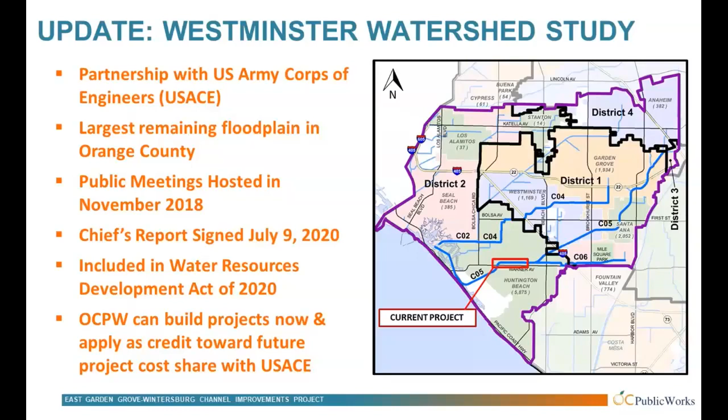Moving into the goal of the Orange County Flood Control District and Orange County Public Works on behalf of the Flood Control District, our goal is to remove people from the floodplain. We want to provide flood protection, and that's our goal throughout the county.

In this particular area, there are 4 major projects we need to complete in addition to the one we're describing tonight. I know when we get to the question and answer period, probably the first question would be: I live in this area, right next to the channel, and I'm currently paying flood insurance. When am I going to be able to stop paying flood insurance? To get to the bottom line up front, I wanted to address that with this slide.

So there are 4 projects in addition to the one we're describing. We're here to talk about the project in the red box, but there are 4 other elements we need to do. One is Warner Bridge at Huntington Harbor. It's a hydraulic constriction that's causing us problems from a flood protection standpoint, so that project we're going to be looking into.

Some of you may remember we completed a project on this channel back in 2015, and we need to come back and complete this element from the tide gates to what would be the extension of Bates Circle. That's shown as number 2 there.

The third element is that after we complete the channel improvements from Warner, there are 3 bridges - Warner, Springdale, and Edwards - and we're looking at the necessary improvements those bridges will need to accommodate the flood protection needs in the area.

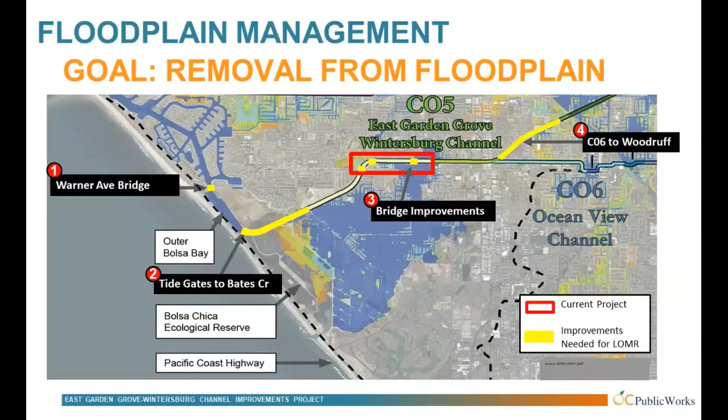So moving on to the specific project, we'll get a little more detail now, honing in. The project location starts at the upstream side of Warner, right where we left off on the previous project, and it extends to about 1,200 feet downstream of Goldenwest. That's right near Diane Lane - if Diane Lane extended across the channel, that's the upstream limit.

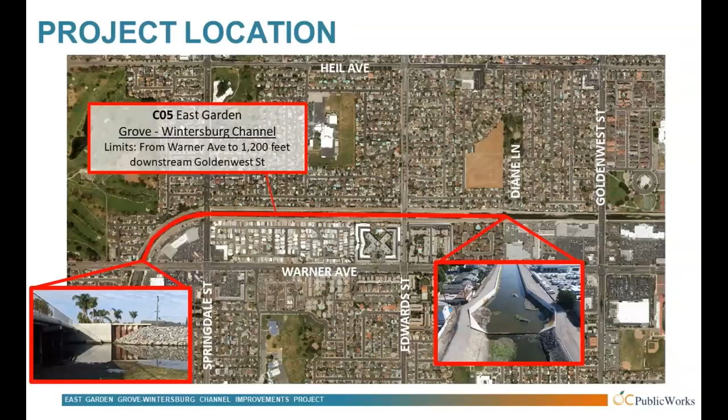Right now there's an existing transition structure where the channel transitions from a concrete channel to the earthen channel, and that's our upstream limit. You can see that in the inset on the right. So the project purpose is flood protection and seismic resiliency. This project lies near the Newport-Inglewood Fault.

You can see on this map roughly where the faults are indicated. That green dashed line crossing the channel not far downstream from our project is the one we're primarily concerned with for the seismic design of the project.

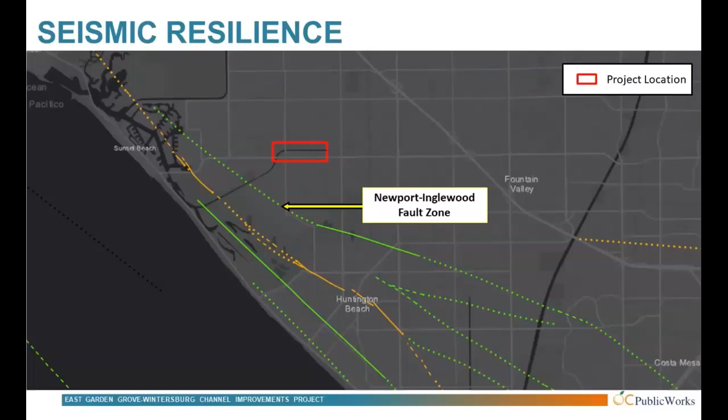So this is a levee. Levees hold storm waters within the channel, and they also hold tidal waters within the channel. Seismic resilience is a big deal when it comes to levee protection, and that's why it's an element of the project. The other major element, obviously, is flood protection.

Everybody on the line is probably either a resident close to the channel or has seen the storm events that produce conditions like in these photos. The channel carries a lot of water and it can get really high. This photo from 2017 illustrates that well. We often get phone calls from the public regarding flood protection here, and this photo pretty much demonstrates the need for the project.

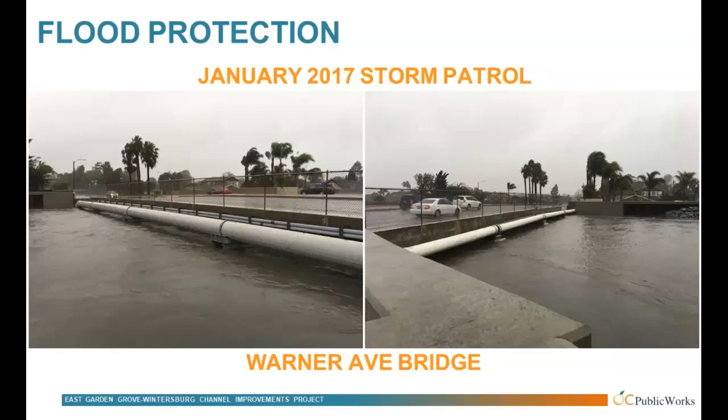Aside from the capacity issues within the channel that we're addressing, there's also what we call local drainage problems. These are on the backside of the levee—we get ponding that occurs, and that's a problem we're looking to address within the project as well.

Moving on to flooding, this is a map straight from the Army Corps' study. Through their hydraulic modeling, they completed two-dimensional hydraulic modeling that predicts where they anticipate flooding would occur. There's a legend there—we're talking about a 25-year event all the way up to a 500-year event that was analyzed. That's what the different colors represent in the floodplain.

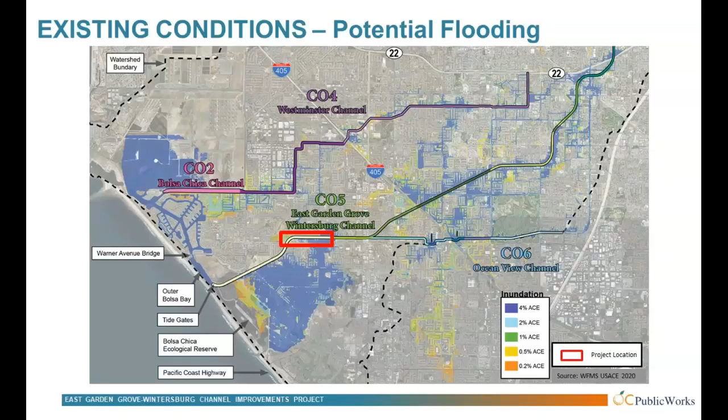The goal of the study and of this project is to make all these blue, orange, and yellow floodplains that are indicated go away. I just wanted to show on a larger scale how big a flood risk this channel is. The project consists of five major elements, and over the next slides we'll go through each of those elements.

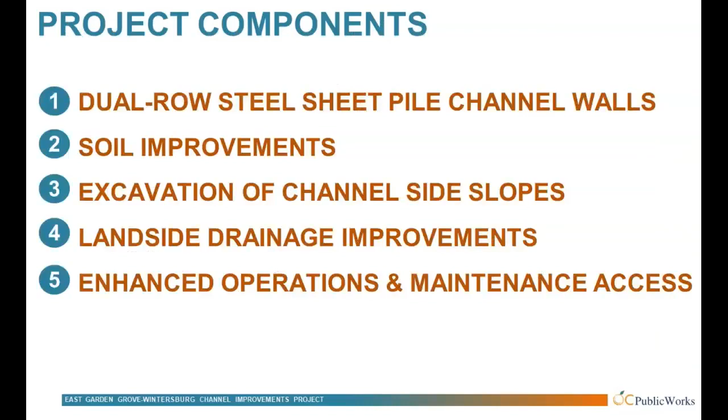The first element is installing a dual row of steel sheet piles. This is very similar to what was installed downstream of Warner. If you live in the area, lots of people actually use the channel to walk out to the Bolsa Chica wetlands area. This project will be very similar to what was installed downstream.

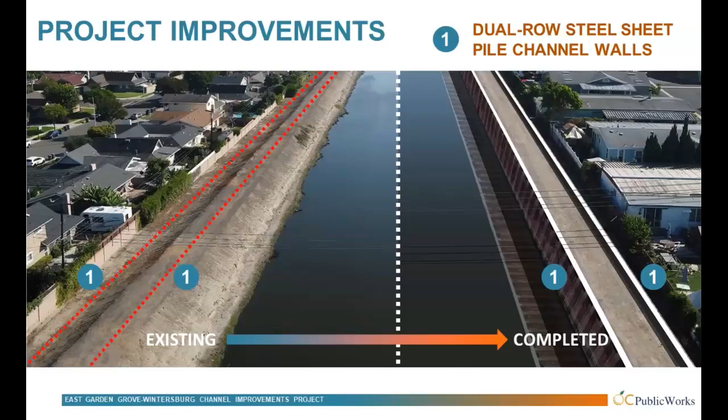As we're mixing that soil, we also inject cement, which strengthens the soil. Through that strengthening and mixing, you produce a really strong soil—it effectively becomes a strong soil wall. Then we have sheet piles on either side of it that are non-erodible faces. The combination of all these things together is how we get our seismic resiliency.

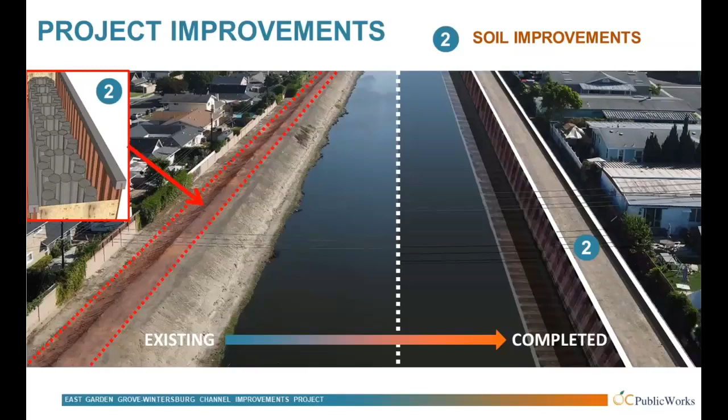After those two elements are done, we look to increase the channel capacity, or the amount of water that can travel down the channel and out into the ocean. So we install the sheet piles, do the soil mixing, and once those improvements are complete, we come back and remove the channel sides, or what we call the soil wedge. On the left side you see the existing levee, and on the right side we excavate out about half of it because the channel gets widened.

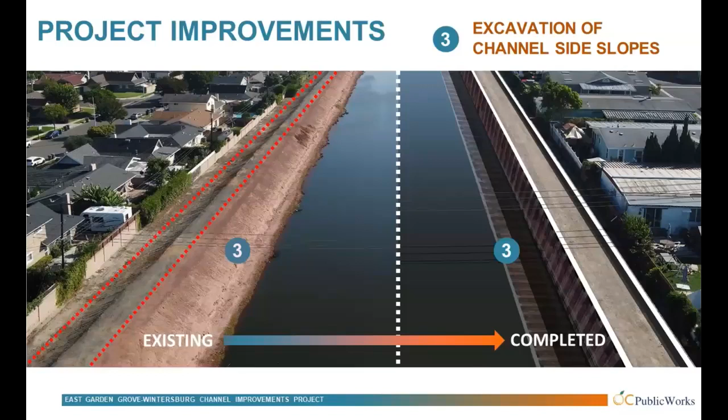So landside drainage improvements can't really be seen all that well in this photograph, but in the field, you're not really going to be able to see it either because it's mostly going to be below ground. What happens is there's the existing soil, there's some level of infiltration that can take place with it, but it's overwhelmed reasonably easily.

What we do with this landside drainage improvements is we're going to be installing underground storage chambers. We're going to be installing pervious material, and that's going to provide capacity to store stormwater below grade. We're also going to be installing some concrete curb, basically at the property line. Through the combination of the storage and the curb, that's going to contain a typical storm within the channel right of way.

If the water starts getting to be too much, then there'll be overflows that direct it into the channel. That should alleviate the problems that we showed earlier, where we're not going to have that ponding that's overflowing into the adjacent property nearly as much.

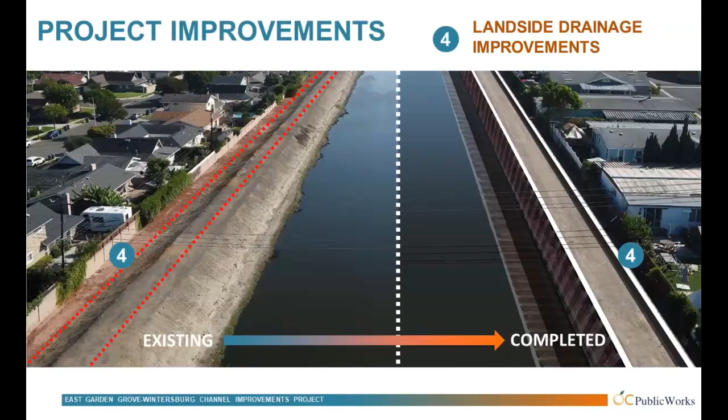Then the final element is operations and maintenance. It doesn't really do us a lot of good if we build this big, beautiful flood control feature and then we can't properly maintain it.

Again, this is a bit of a nuance, but effectively what happens is we're installing our maintenance roads at the correct width. We're ensuring that we have the adequate horizontal distances so that we can get out there with our heavy equipment, and our operations and maintenance service area can maintain and inspect the channels properly.

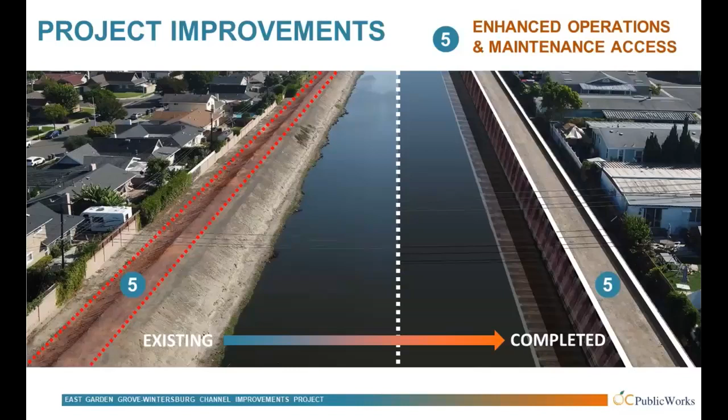So this is a rendering that was provided by the project team. The left side is what we have today—it should look pretty familiar. The right side is hopefully what it looks like at the end of the day. It should look pretty close to that.

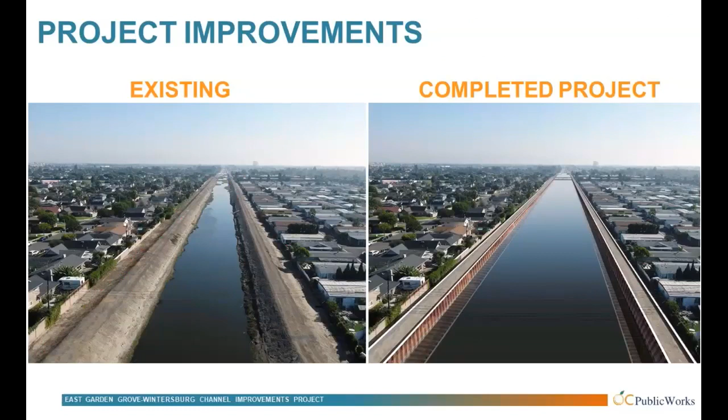This is another rendering, this one of Edwards Street. Again, the left side is existing, and the right side is what it'll look like post-construction.

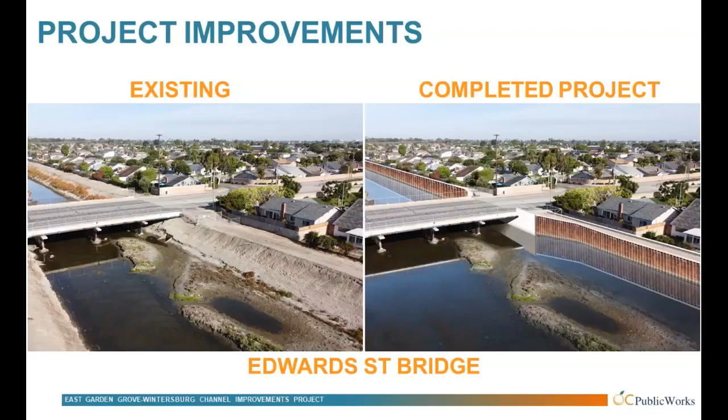So diving into project schedule, how long it's going to take, to let you guys know what to expect. We awarded this as a design build contract—actually our first design build contract on the horizontal side that Public Works has done, which is pretty exciting for us. We did that back in November, and now we're here before you today for our pre-construction community meeting. We're going to be kicking off our first phase of construction in August.

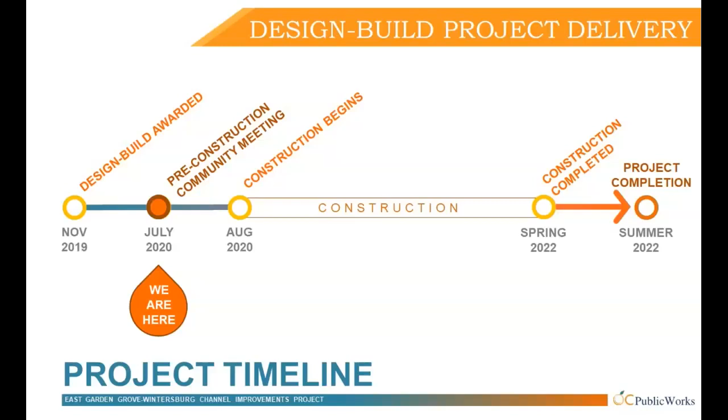Construction is slated to extend until spring of 2022. I'll caveat that by saying it's a sequential construction, so I'll provide more details on that in a bit, but it's not going to be every element of the project under construction for 2 years—it'll kind of cycle through. Then we'll have some project closeout, and we're looking to finish up everything with the project in the summer of 2022.

Working hours, the days, duration, et cetera. We'll have standard working days of Monday through Friday. We do have the option to work on Saturdays if needed, though ideally we won't need that. Where we would use Saturdays is if we need to expedite the project—that's where we'd be looking to do some work on Saturdays. We'll avoid that as much as possible.

Working hours are 7 to 7. However, the primary working hours, when there would be a lot of noise and activity, that's going to be more or less between 8 and 6. Starting at 7 is getting the site mobilized, getting the crews mobilized on site and everything set up for the day, and then the last hour or couple hours of work is set up for cleaning up the job site and buttoning it up for the evening.

The duration, as I mentioned in the previous slide, is August of this year until 2022. Of course, depending on weather and other factors, that schedule is going to be adjusted. But that's our target, and we feel pretty confident in the durations that we have in the construction contract. We have a really good partner in JF Shea, the contractor, so we feel reasonably good with this construction schedule.

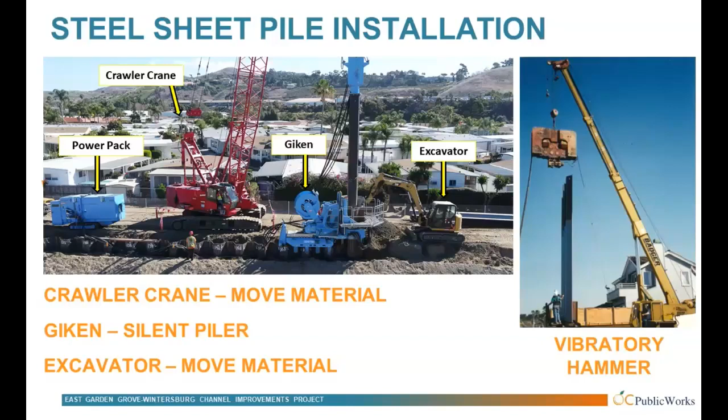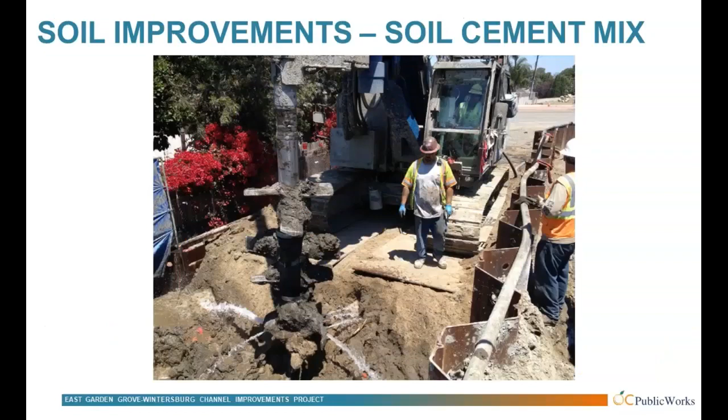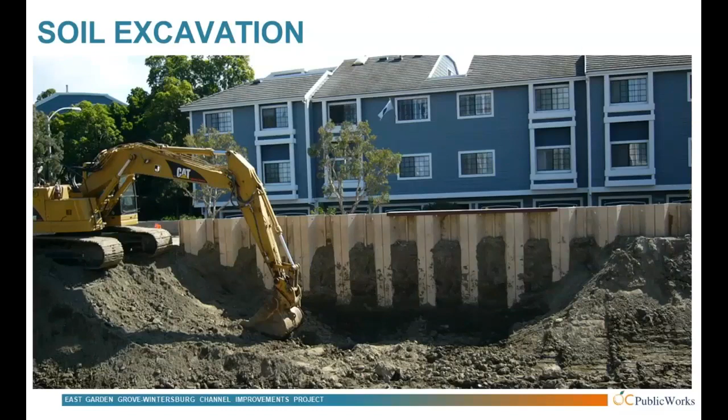Then, as I mentioned, once all that work gets completed, it's time to do excavation and increase the channel size. We'll do that with just conventional equipment - there'll be excavators, haul trucks, and some bulldozers to push material around within the channel, but that's pretty straightforward. We'll just dig it out, put it in a truck, and haul it away.

Other things to expect during construction: dust and noise monitoring and mitigation. We'll be regularly watering the site to control dust, and we're installing sound walls around the deep soil mixing equipment to keep it quiet, especially wherever there's a sensitive area. The equipment we're using is also quieter than standard, and luckily California has pretty strict regulations on equipment, which benefits all of us.

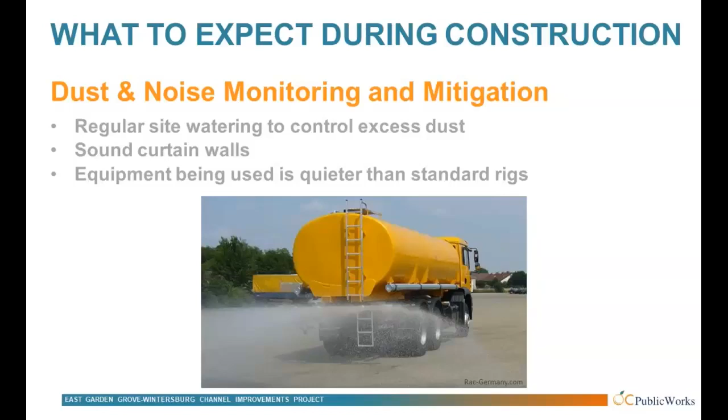Other things we need to do include environmental monitoring. We have pre-construction surveys to complete, surveying for eelgrass and even invasive species we need to remove as part of our regulatory permits. We'll also be looking for protected species to make sure we don't impact any of that.

Another element involves the properties adjacent to the channel itself. We'll have a pre-construction survey team come out, so expect a notification within the next month or so. If you'd like, we can have them survey your property and take photos of everything, so we can document any damage that takes place from construction. That way, if something we do impacts you, we'll be able to correct it. That's accomplished through these pre-construction surveys.

We'll be doing water quality monitoring and biological monitoring during the bird nesting season. Those are all big items for us.

Another major element is the overhead power lines. Some of these we're able to move ahead of time so they won't be in the way of our cranes when we're swinging around the sheet piles. That work is being accomplished by SCE ahead of time. You shouldn't experience any power interruptions—SCE has told us they expect to get this done with little to no outages. If they do need an outage for a switchover, you'll be notified a couple weeks in advance so you can prepare, but that shouldn't be an issue. We're doing everything we can to avoid that.

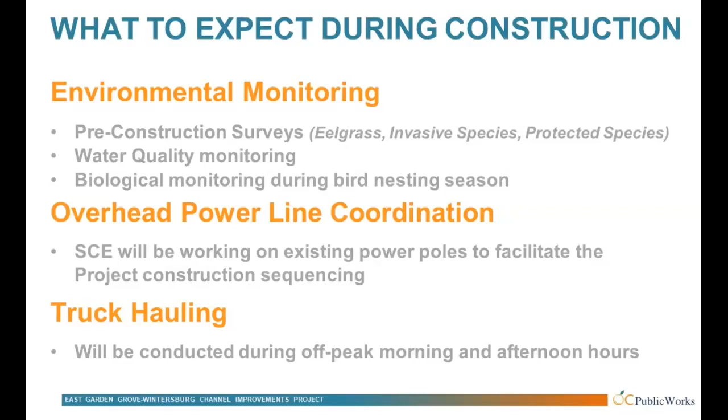So how can you stay informed about the project? There are several ways. One is to pay attention to the website, ocpublicworks.com. You can also email us at projectinfo with any questions, comments, or concerns—that's a great way to reach us. If you'd like to be part of a stakeholder list to stay informed, just email us and we'll add you. You can also call us, or follow us on our social media channels—it's 2020, even the government's doing social media—Shannon will be uploading great photos and keeping people informed that way. The fifth way is the project information signs: when construction is about to start, you'll notice signs popping up along the channel with contact information for the project management or construction management team. Through all of these, you'll be able to get a hold of us.

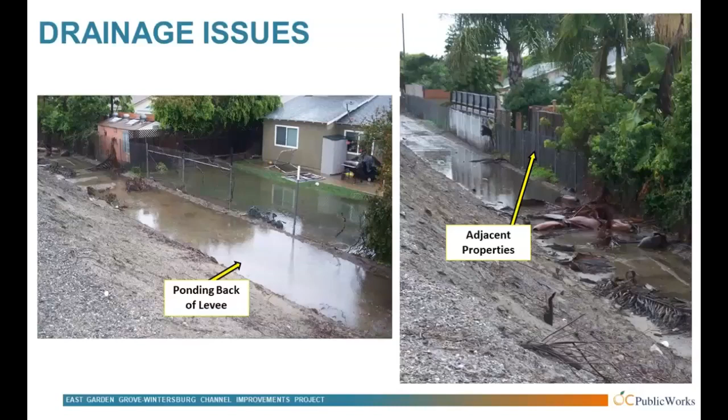We have noticed an increase in rats in Sierra Mobile Estates. What type of support and abatement will be done to help prevent more rats from coming into our neighborhood when you dig up the flood channel?

That is a good question. I think what I'll need to do is provide you a better answer than what I can do right now. In general, I think the rats fall into the category of our operations and maintenance team. Also, vector control is the primary combatant of those.

So Kim, if you could email - because I don't want to ask you to post your contact information within the Q&A - if I could ask you to do me a favor and email us that same question to the project information email address, then we'll get you a good answer on exactly what you can do.

Thank you, Kim. The next question is from Victoria. You just answered about the tarps. We are one of the properties that are only chain link. We will have no privacy and have dust concerns.

Okay, yeah, as I mentioned, part of the standard, we mentioned the stormwater pollution prevention plan. One of the standard approaches in those plans is eliminating dust, because not only is dust an annoyance from an air quality standpoint, it's also a water quality issue. So we can't have dust blowing from the site into the channel, and we don't want it to go the other way either. In the room here with me is my colleague from JF Shea, our contractor, and he's taking diligent notes. So this is something we'll be addressing during construction.

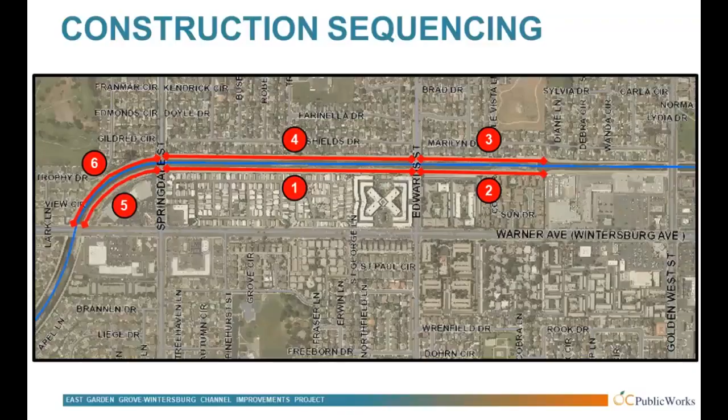And then Rob just posted a comment, says thank you for the excellent presentation. Thank you for attending, and I believe that is all the questions I have. I'll put up the question box one more time if anyone wants to raise their hand and make any last comments. We'll leave the line open for a few minutes here if anything comes to mind.

Oh, a couple more questions, I apologize, I didn't scroll all the way down. From Victoria: I want to thank you for being patient with my questions. I'm going to email you my address, and I have a couple of other questions. We look forward to hearing from you.

And it says, we see too many homeless in the canal. Yeah, we kind of see too many of it everywhere. It's something as a society, hopefully we can address.

And I have a hand raised from our Chief Engineer, Khalid. I'm going to unmute you now.

Thank you, Melissa and team. I really appreciate you guys taking the time and doing this. I would like to send a message to the residents that our team has done everything they can to make this construction project tolerable for you guys, and we want to try to work with you in the future. So please get in touch. Obviously, we'll provide you all the numbers and contact information of our contractor. We have a great contractor and a great relationship with them. And this is a partnership. We want to try to get this thing done without a lot of heartburn. So feel free to give us a call, get in touch with my team, and we're happy to help you. If you see something out there that doesn't make sense, please pick up the phone or send us an email.

Thank you, Khalid. Just to reiterate that, here at the county, we're here to serve the public. You guys are our client, and so we definitely want to hear from you, and we work to accommodate requests as much as we can. So thank you for that, Khalid.